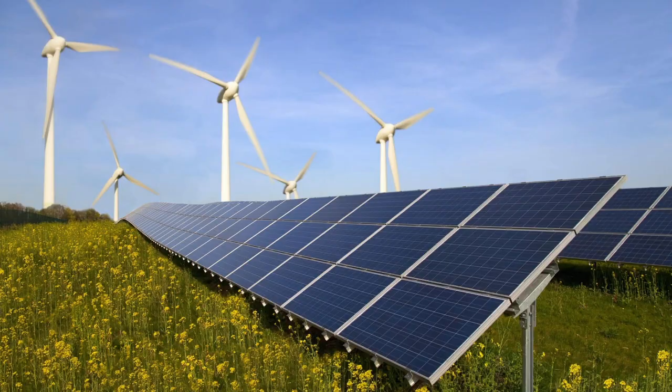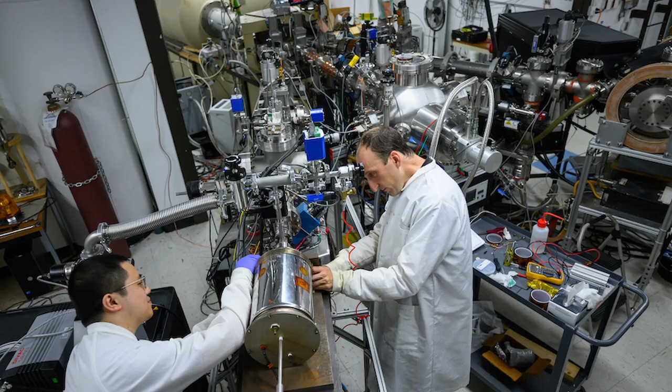Nuclear power is an incredibly debated topic all around the globe. Many countries are making enormous pushes toward nuclear energy, while others are scrapping it to be replaced by other renewables. Politicians around the world are also incredibly split on the topic, with some bringing it into their agenda and others outright fighting it.

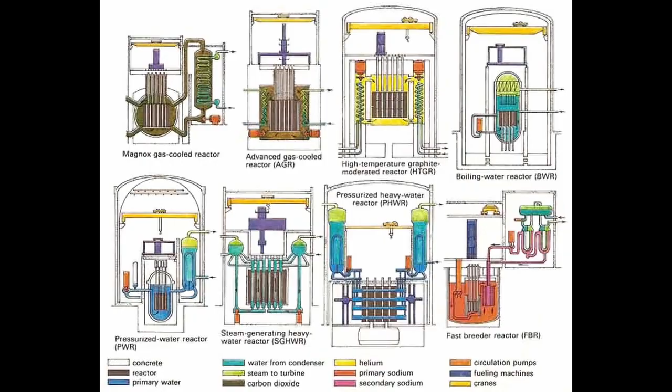However, ever since its invention in 1942, scientists have been looking to find ways to make a better, safer form of energy that could be thoroughly incorporated into our energy grid. As a result, many ideas for new types of reactors have been proposed. One of these such reactors was the Fort St. Vrain nuclear generating station.

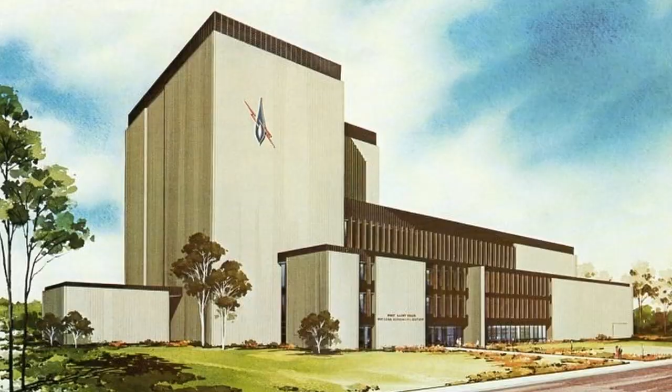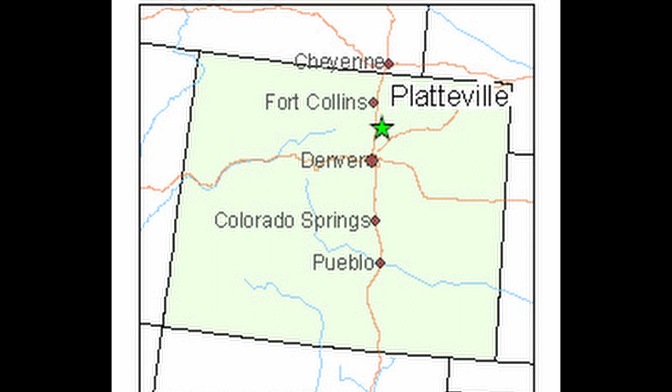Throughout the late 1900s, the issues of climate change began to become more prevalent in society. Faced with an ever-worsening climate crisis, the Fort St. Vrain nuclear generating station was one of the many solutions created to solve this problem. This commercial power plant was a next-generation, high-temperature, gas-cooled reactor built near the town of Platteville in Weld County, Colorado.

Although the nuclear plant was not very successful, it still served as an extremely efficient proof-of-concept power producer, as well as a major step forward in nuclear engineering. It also served as a major turning point in history, paving the way for current nuclear technologies and safety, and demonstrating optimal cleanup processes for shutdown and destroyed reactors.

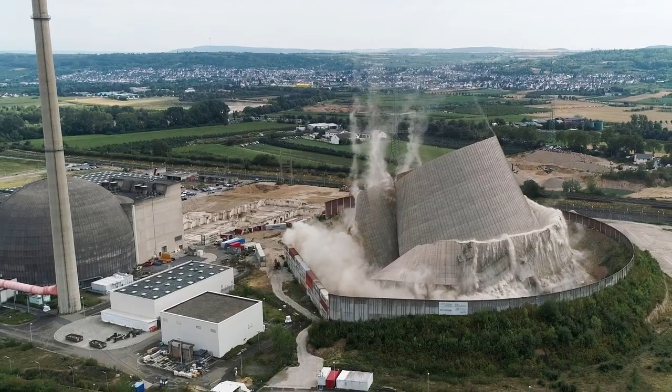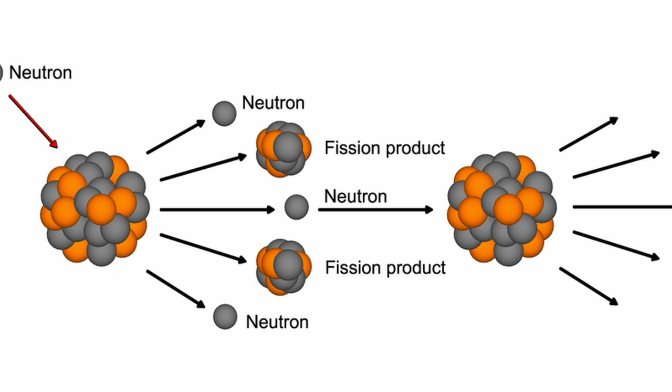In 1934, physicist Enrico Fermi made a groundbreaking discovery when he found that atoms could be split into lighter atoms by bombarding them with neutrons. This discovery paved the way for our understanding of nuclear fission and its immense energy potential. A lot of research culminated in Fermi's team creating the first controlled nuclear chain reaction in 1942 with the Chicago Pile 1 reactor.

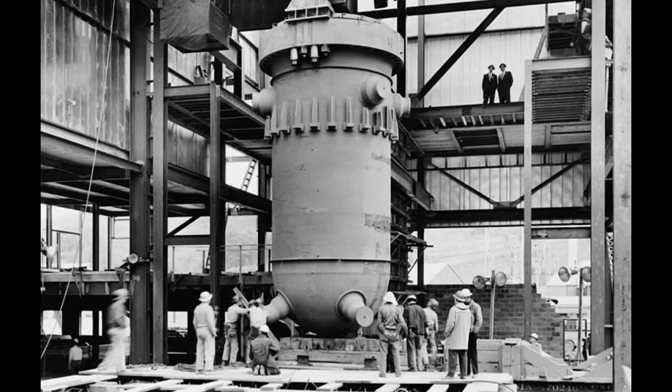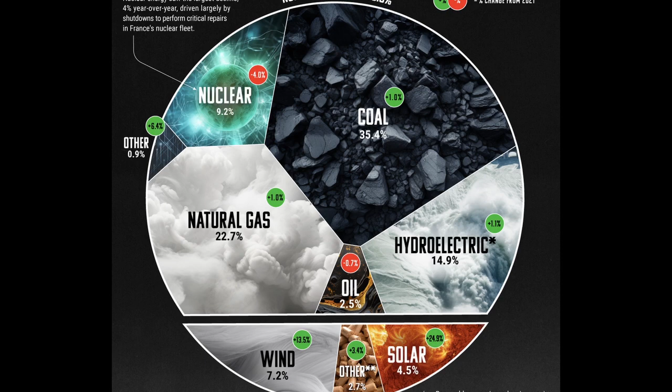Initially, nuclear research focused on developing weapons during World War II, but as electricity demand soared, attention shifted to harnessing nuclear energy for peaceful purposes. This shift led to the construction of the Experimental Breeder Reactor 1, which produced the first electricity from nuclear power in 1951. Today, nuclear energy supplies approximately 9 to 10% of the world's energy needs.

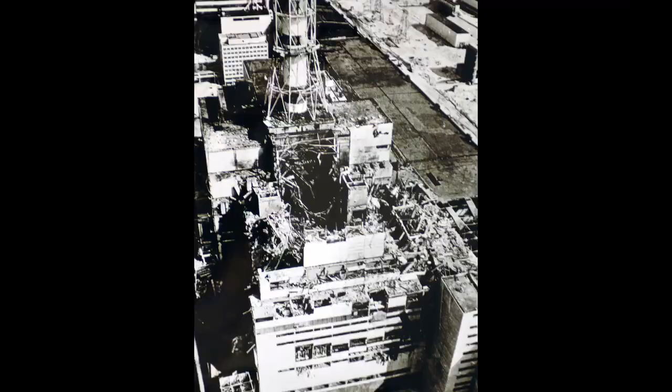Despite its contributions, the industry has faced significant challenges. The accidents at Three Mile Island in 1979, Chernobyl in 1986, and Fukushima in 2011 highlighted the risks associated with nuclear power, leading to heightened public concerns and debates about its safety and future viability.

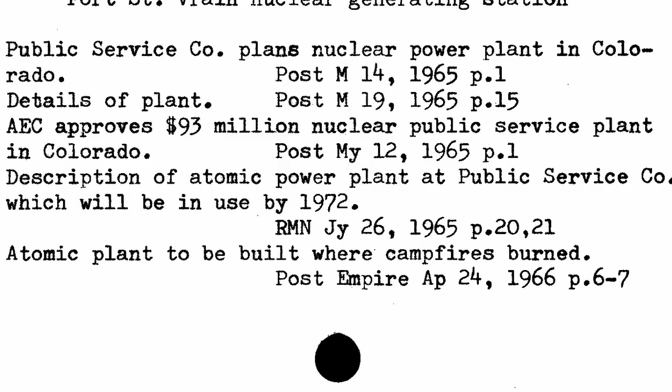The Fort St. Vrain nuclear generating station was Colorado's first and only nuclear power plant. The Public Service Company of Colorado announced plans to build the plant on March 14, 1965. Visually distinct from conventional nuclear power generators, the Fort St. Vrain plant lacked the typical large white concrete funnels seen in other reactors worldwide. This is because the Fort St. Vrain power plant was a new, next-generation type of generator known as a high-temperature gas-cooled reactor.

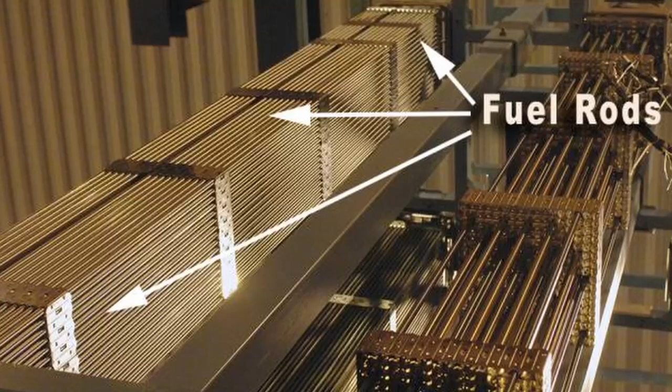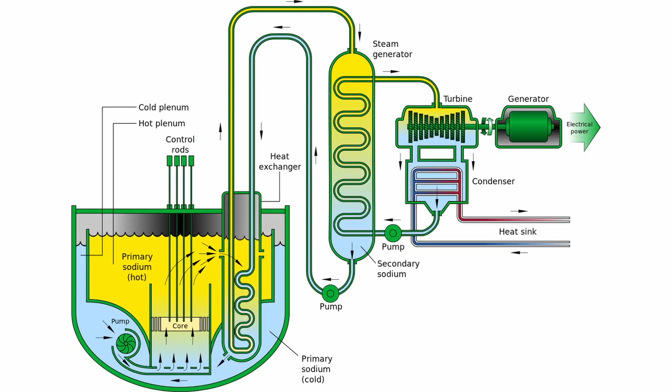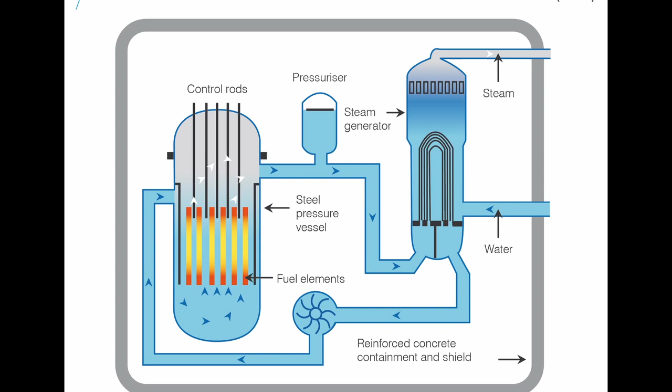In a reactor, there are three main components: the fuel rods, usually made of uranium, which are bombarded with neutrons to generate heat; the coolant, which is used to cool the rods and produce steam to turn turbines; and the moderator, which is used to slow neutrons to allow for nuclear fission. Typical nuclear reactors, known as pressurized water reactors, use water to act as both the coolant and the moderator. HTGRs instead use graphite as the moderator and helium as the coolant.

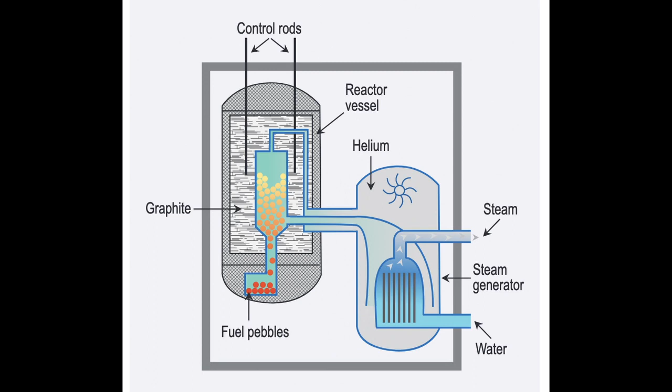This design is considered to be significantly safer, as graphite has high thermal inertia, meaning that it resists changes in temperature very well. As a result, a failure in the helium coolant system would mean that temperature increases would be gradual, affording operators crucial time for intervention. Furthermore, helium's inert properties ensure that it remains non-radioactive.

Work to build the nuclear reactor began in September of 1968. Total construction costs reached around $200 million, with initial tests beginning in 1972 and the first commercial power distributed in July of 1979.

The reactor showed a thermal efficiency of 39 to 40%, which was amazing for a steam cycle power plant. Along with that, it had a maximum burnup, or amount of energy extracted from the fuel, of 90,000 megawatt days per metric ton of heavy metal. This was incredible compared to the normal light water reactors with burnups of 10,000 to 40,000 megawatt days per ton.

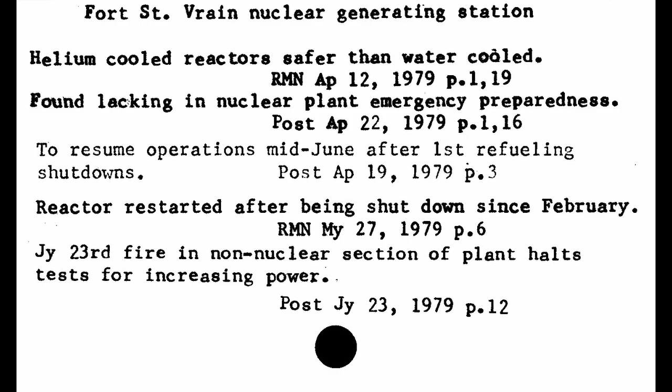However, the life of the plant was not all smooth sailing, not even close in reality. Less than a year after it began producing electricity, core temperature fluctuations were seen, and a few days later, the reactor was shut down so repairs could be made. Issues like this continued throughout the plant's life, with the biggest problem originating from the helium circulator.

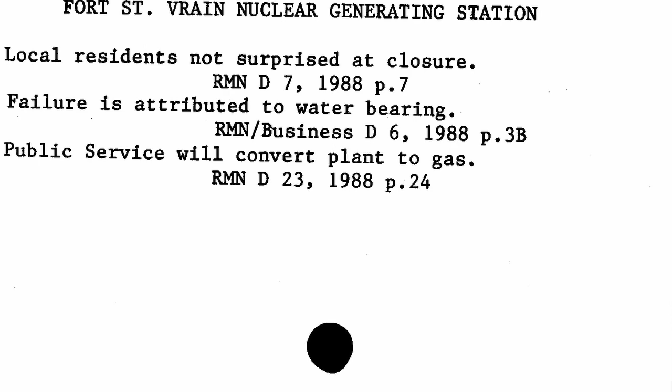The small molecules of helium were very hard to keep contained, and needed extreme measures to keep them sealed in the loop. Throughout the rest of the 1970s, many issues continued to rise, including fires, temperature control issues, and leakages. Issues with moisture buildup resulting from the sealing mechanisms used on the helium circulator caused large issues with corrosion throughout the plant.

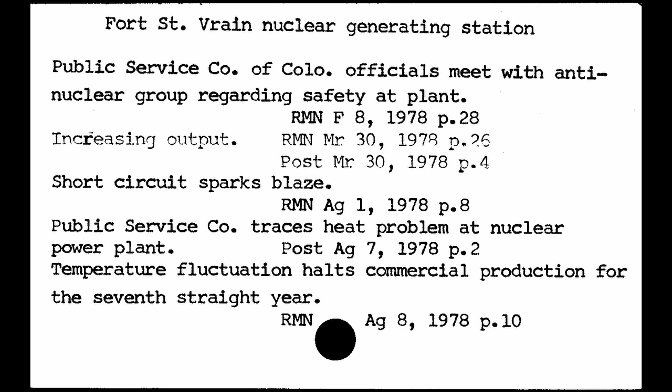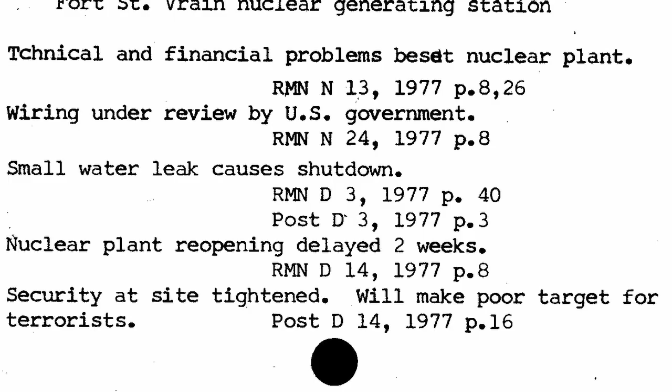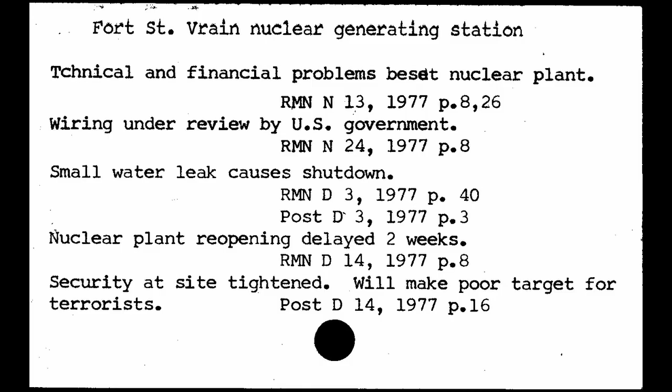As time progressed, the Fort St. Vrain generating station began to face electrical issues in their systems as well. Often, backup systems failed to come online, leading to more moisture buildup issues, causing even more electrical problems. Due to the corrosion and electrical issues, plant shutdowns became a regular occurrence.

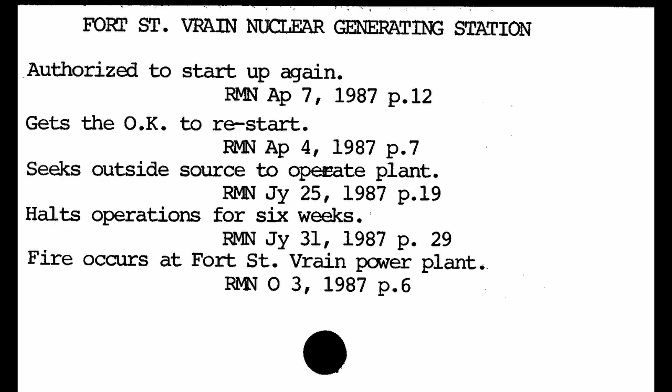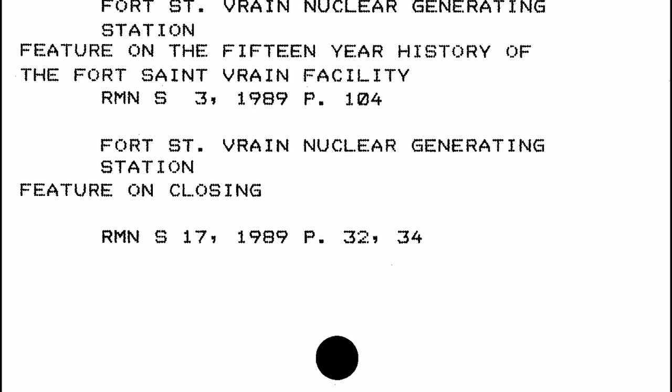As a result, the PSCO began to question the economics of continued operation, and in 1989 indicated that the plant was under consideration for closure. Along with this, incidents such as the Chernobyl disaster in 1986 led to even further negative sentiments. Finally, in mid-1989, a control rod assembly was found to malfunction, and repairs were deemed too expensive, leading to the end of all operations. Defueling of the plant was completed in 1992, and the decommissioning process began immediately afterward.

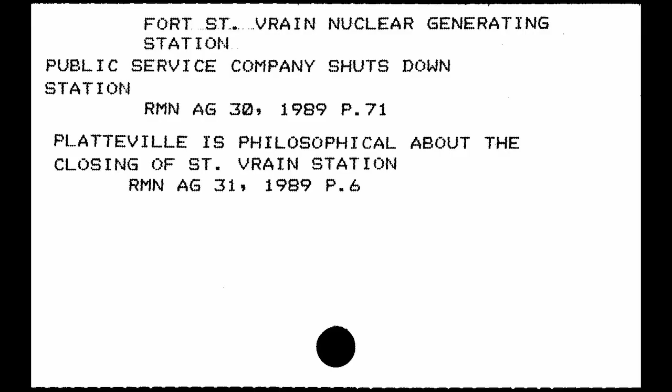In February of 1995, the reactor core support floor was removed, marking the end of the nuclear generating station. However, plans to convert the station into a natural gas power plant were proposed, and construction on the first gas turbine was completed in May of 1996.

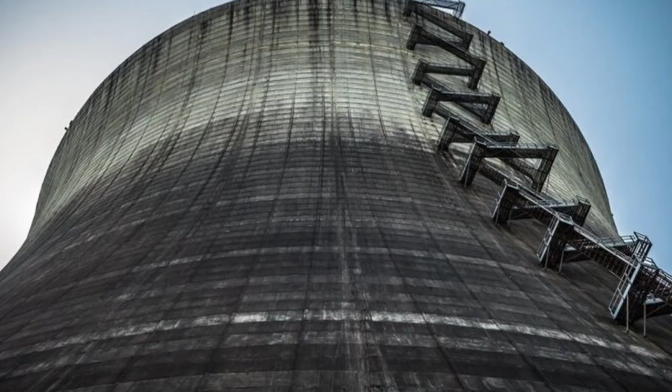This plant was a turning point in many ways, not just for Colorado, but for all of nuclear power throughout the entire world. Being the first and only nuclear power plant in Colorado, it helped usher in a new age of cleaner, greener sources of electricity for the state. Along with that, it brought with it a much greater understanding of nuclear power, allowing Colorado politicians to incorporate it into their agendas and helping residents understand the implications and effects such a plant could have.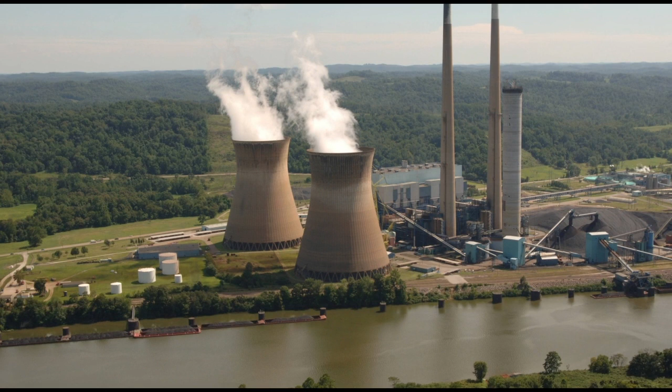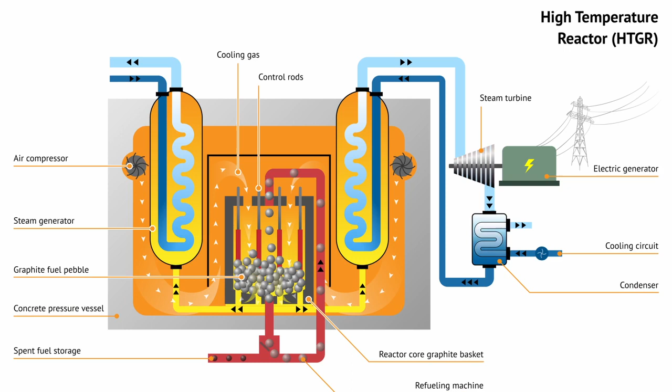Colorado was able to gain extensive knowledge about the environmental impacts of a nuclear plant, from the impacts on nearby water and wildlife ecosystems to the impact on humans living near it. FSV also impacted the world of nuclear energy immensely. As mentioned before, this was an HTGR, or high temperature gas cooled reactor. Though not the first ever built, it was the first of this type of nuclear reactor to commercially provide power.

This was a proof of concept reactor that did its job quite well. Though it experienced many issues, it showed the safety of these types of reactors, illustrating its capabilities to avoid a meltdown, even under the stress of many other issues. Today, many nuclear reactors are built using this archetype, based on lessons learned from the FSV power plant.

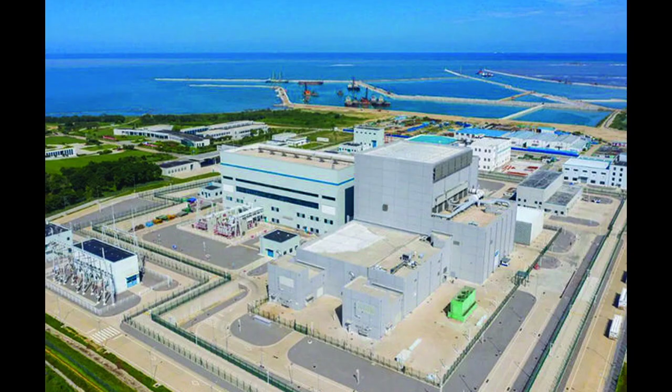Finally, one of the major reasons behind this reactor's turning point status is a result of how it was decommissioned. This plant was actually the first commercial-scale nuclear power plant to be decommissioned in the United States. The plant was shut down using many new, innovative, and safer techniques, including some, such as the method in which the graphite blocks were removed, that continue to be used today.

Though the Fort St. Vrain nuclear generating station was not a completely successful power plant, it still served as a major turning point in Colorado's history, as well as the history of nuclear energy throughout the globe.